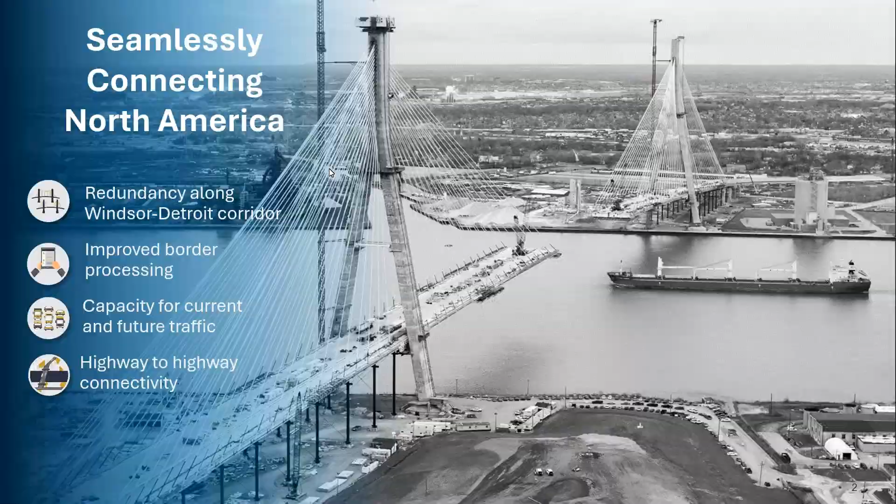In September 2018, WDBA selected Bridging North America as its private sector partner to design, build, operate, finance, and maintain the project. It's important to note that even though we have a private sector partner, WDBA continues to play a significant role in delivering the project alongside our partners at the Michigan Department of Transportation. Our private partner, Bridging North America, is comprised of companies such as Dragados, Fluor, and Aecon, with AECOM as the lead designer.

Before we begin, I'll do some quick context setting to familiarize you with the project and give you a lay of the land for when we're out on site. Valued at $6.4 billion, the project includes the delivery of 4 major components: the bridge, the Canadian and U.S. ports of entry, as well as the connection into the Michigan interstate system.

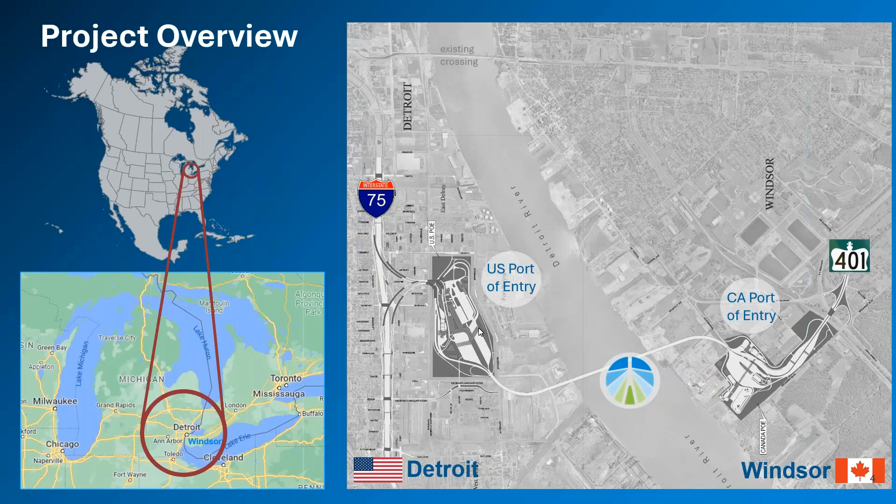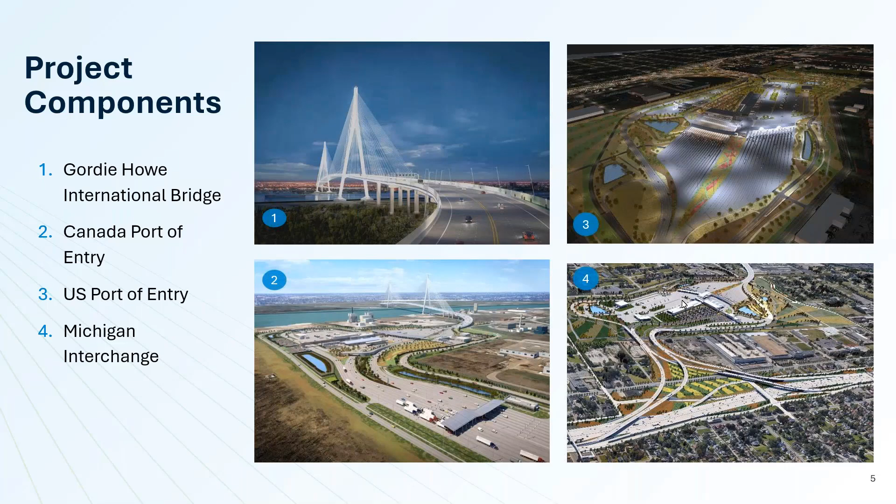These renderings show the 4 components of the project: the bridge, the 2 ports of entry, and the Michigan interstate. Each of these components is significant in its own scope and complexity. However, the focus of this presentation will be on the cable stay bridge.

An interesting aspect of the project is the environmental and sustainability considerations that have been incorporated. The Gordie Howe International Bridge project is an example of sustainable infrastructure that contributes to a clean environment, protects communities from impacts of climate change, and conserves resources for future generations.

Among numerous features, some key examples of sustainable design integrated into the project include LED lighting for exterior lighting and in port of entry buildings designed to take advantage of natural light, a water management system to reduce water demand, and integration of peregrine falcon boxes into the bridge design.

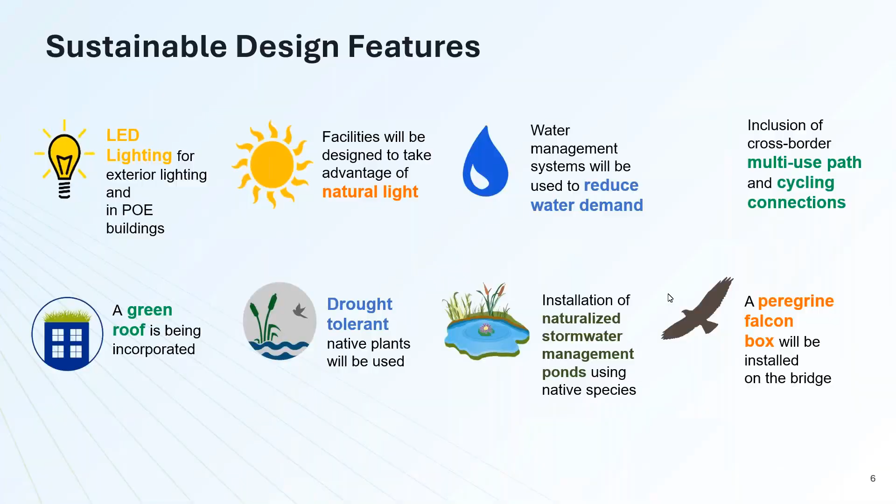The cable stay bridge will have 6 lanes, 3 Canadian bound and 3 US bound, with a clear span of half a mile and no pier in the water. The bridge is built for a 125-year service life.

The main tower is approximately 722 feet. The total length of the bridge from abutment to abutment, including both approaches on the US and Canada, is 1.5 miles. The main span is half a mile, roughly 2,800 feet, between the towers, making the bridge the longest cable stay span in North America and the 10th longest in the world.

This is also the world's longest composite deck cable stay bridge for this type of deck. The approach bridges consist of 9 spans on the Canadian side and 9 spans on the US side.

There will be more discussion in detail about the substructure, but briefly, the tower and pier are formed in reinforced concrete. The superstructure for the main bridge is a steel girder with a full depth precast concrete deck. The approach pier consists of steel curved girder with cast in place deck.

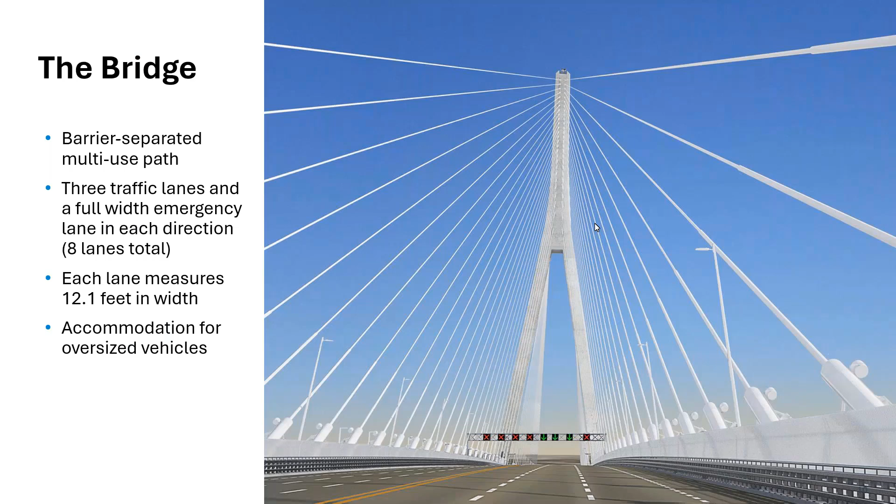A 125-year service life was demanded, and the bridge is built for that, for non-replaceable elements. We will discuss the foundation in more detail.

As construction is near completion, we are now in the process of final commissioning and testing.

In addition to being the longest cable stay bridge in North America and the 10th longest in the world, Gordie Howe International Bridge will include features specifically created for commercial traffic.

The bridge will include lanes that measure 12.1 feet wide with an extra wide lane to accommodate oversized vehicles. Additionally, the multi-use path for pedestrians and cyclists is separated from vehicular traffic with barriers, and that separation continues throughout the entire footprint. Now we'll go into greater detail about the design features of the Gordie Howe International Bridge.

This is the bridge superstructure elevation view, showing the navigation channel envelope for the Detroit River, which is roughly 2,500 feet by 137 feet. The maximum under bridge clearance we met is 152 feet in the center span.

The US side span is around 1,171 feet, and the Canadian side is around 1,155 feet. We have 2 side span piers, as you can see on both sides, and 1 anchor pier at the end of the back span of the cable stay bridge.

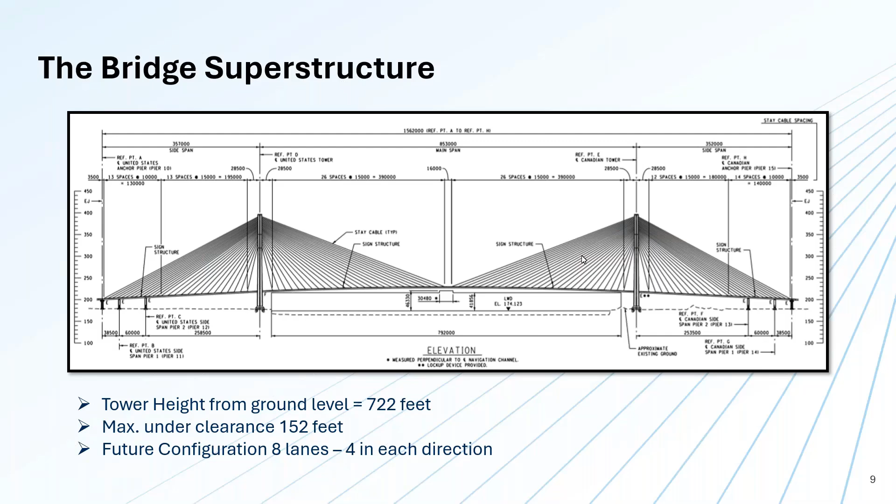The superstructure for the entire cable stay bridge is steel with post-tension precast. Steel used in the bridge was sourced from both Canada and the United States, under the Can-Am provisions of the project agreement. This is an image of the bridge superstructure deck.

The maximum superstructure depth is 10 feet. The superstructure is a closed box with a soffit panel at the bottom and concrete deck slab on top, comprised of two 8-feet edge girders on the sides, three internal longitudinal girders, and multiple floor beams at 6.4 feet spacing from anchor pier to anchor pier, connecting the two edge girders on the sides.

The deck thickness is 10 inches, including a 0.4-inch sacrificial top surface thickness. A 2-inch layer of latex modified concrete was used as a surface overlay. The precast deck panels are post-tensioned in both directions and use around 10,000 psi concrete. The deck is designed as a zero tension limit in the service limit state, which was required to improve durability and service life.

Also, in terms of the structural design feature, the main towers are in the inverted Y configuration with two planes of cable connecting to the exterior of the deck. As I mentioned, the tower and substructures are all built with reinforced concrete.

The towers were constructed on an area with limestone rock located roughly 100 feet below the existing ground. The foundation depth for each tower leg is roughly 25 feet with a regular shape, as you can see in the drawing. The foundation type used is a drilled shaft around 10 feet in diameter. There were 6 drilled shafts for each side of the leg for each tower, and those foundations were rock socketed approximately 20 feet.

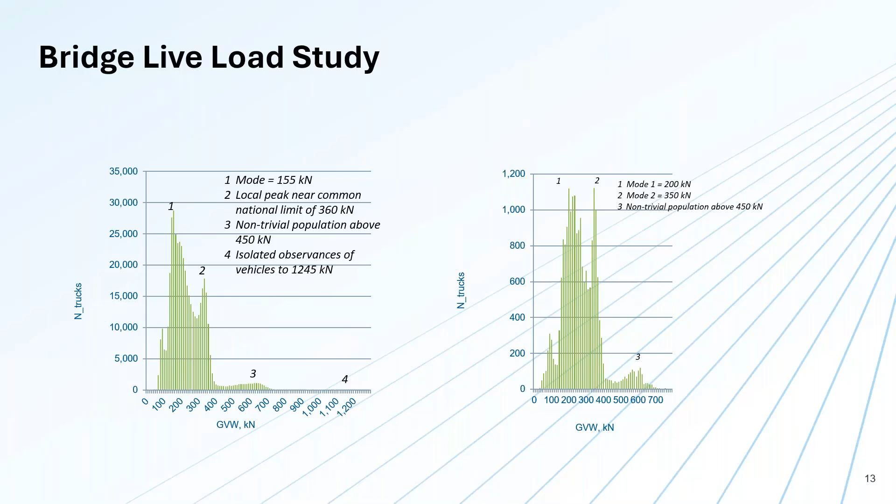The Canadian data on the right side is from the 2012 Ontario Commercial Vehicle Survey, and includes about 20,000 records from Southern Ontario. The maximum truck weight presented in the CVS data used in the load study was 180 kips. Two sets of normal traffic live load were used for the design based on the live load study for each design procedure, following the Canadian and US calculations.

The following sets of normal traffic live load are substituted for normal traffic live load in the Canadian and AASHTO codes. The intensity of the distributed live lane load was reviewed. The design truck is the same for both the commercial vehicle lane and mixed use lane.

For the Canadian design calculation, the modified loading will be considered. The truck used will be the CL625, which is the standard truck used by the Canadian Highway Bridge Design Code. The HL93 truck from AASHTO LRFD was modified to what we call a WDBA AASHTO truck, as shown on the right side, and was modified to become a 5-axle load.

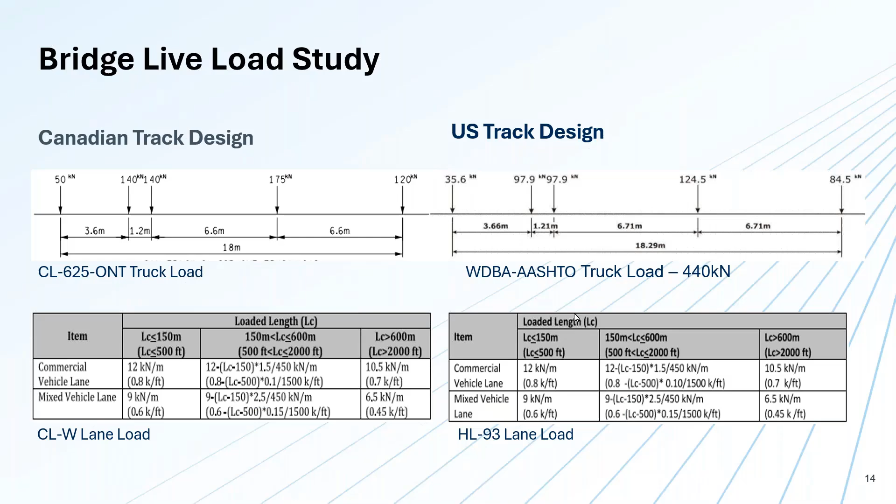In addition to the live load study, special loading design was considered for this crossing. The area goes through multiple parades and marathons, so we wanted the designer to consider that in the design.

Thermal gradient loading was also required, along with site-specific seismic design using lifeline, irregular critical structure criteria. These are terms used based on AASHTO and Canadian standards - they refer to the same thing but use different terminology.

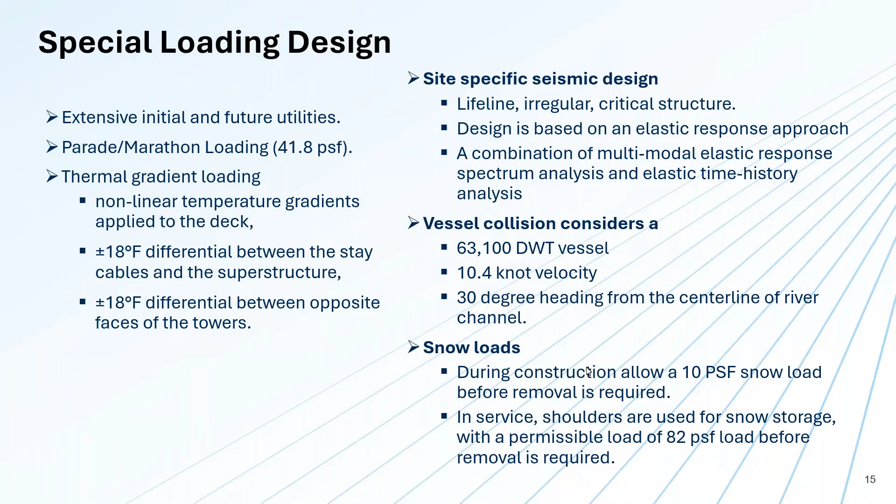Even though we didn't have any infrastructure in the river, the piers are located on land adjacent to the seawall or embankment on both sides. We wanted the designer to consider the vessel collision impact on the seawall, and any impact that could transfer through the soil into the foundation of the tower. Snow load was also considered due to the length of the bridge.

To meet the service life of 125 years, requirements were specified on certain criteria in addition to the durability analysis. Stainless steel reinforcement was used in the bridge deck and the precast. Structural steel options were allowed for the designer to choose from.

They ended up using the A709 structural steel. All structural steel, including weathering steel if used, shall be coated to meet the requirements for the service life.

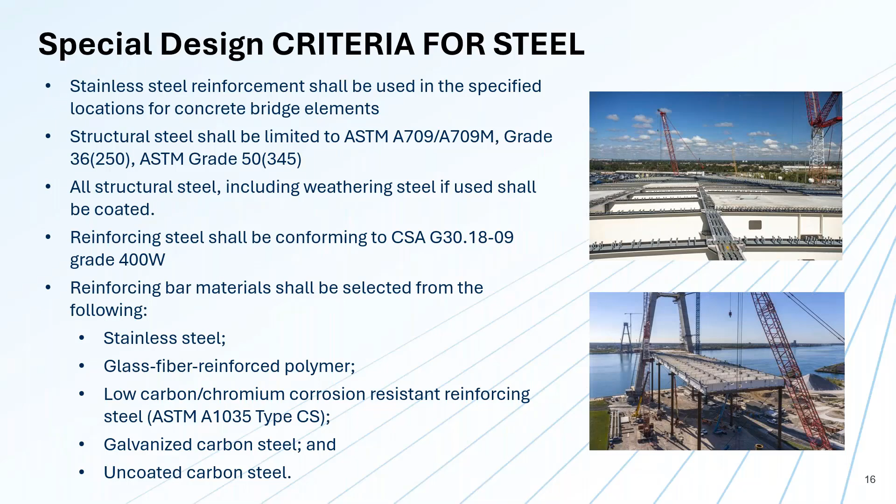The reinforced steel used in the bridge was grade 400W. The technical requirements also allow the designer to select different types of reinforcement, but stainless steel was mainly used when specifically required by the technical requirements or by the durability plan preparer and designer. They also used some typical low carbon steel.

The parallel strand system is composed of individually sheathed and filled 7-wire strands encased in outer extruded high density polyethylene, or HDPE, and are 0.6 inch in diameter with a cross-sectional area of 0.23 square inches. The approximate forces on the cable vary between 770 kips to 2,800 kips, depending on cable location and length. There were 216 parallel strand cables used on the bridge, with the number of strands varying from 38 to 122 depending on the cable.

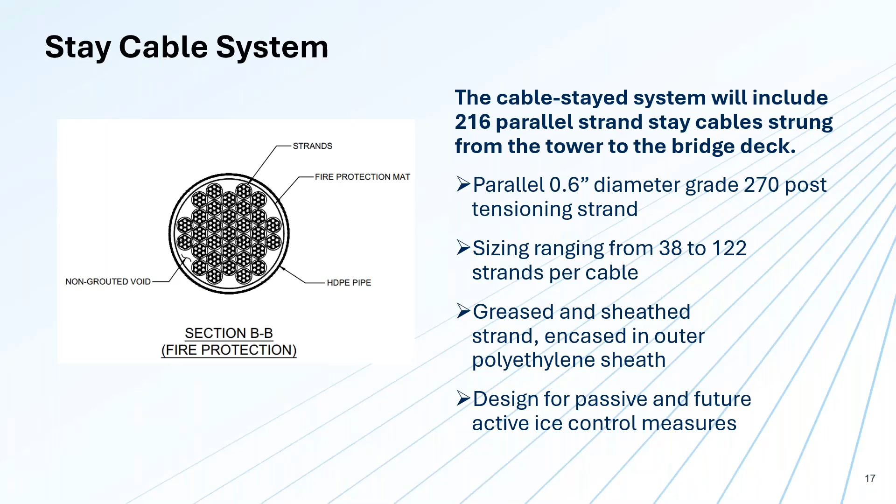I mentioned the service life and design life. These are the service life requirements considered for the project in 3 steps. During design, the concrete cover, concrete mix requirements, steel detailing and coating, and similar matters needed to be considered. During construction, we wanted the means and methods selected to consider the service life requirements, and very stringent QA/QC requirements were identified by the agreement for the contractor to follow. Also, because it's a P3 project, we wanted this considered during operation, as our private partner will be responsible for maintaining the bridge for a 30-year term.

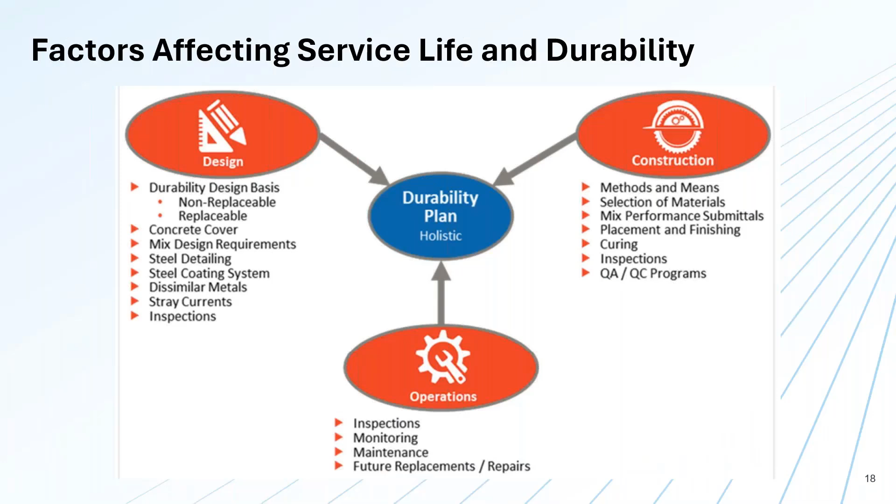As I mentioned earlier, the bridge is the longest in the world utilizing a composite steel superstructure with a concrete deck. This represents a step forward for the bridge, and therefore aerodynamic performance was a key consideration in the design. Wind tunnel tests for the complete structure and for the bridge under construction were conducted at RWDI facilities in Guelph, Ontario, one of the largest facilities in North America for this kind of signature and significant project.

Requirements for the test were: the bridge shall not exhibit aeroelastic instability during the construction phase for a wind velocity having a return period of 1,000 years. The bridge also shall not exhibit aeroelastic instability, flutter, or galloping in service for a wind velocity having a return period of 10,000 years, during the operation phase. The bridge is aerodynamically stable in wind beyond 1 in 10,000 years, assessed to be a wind speed of 108 miles per hour.

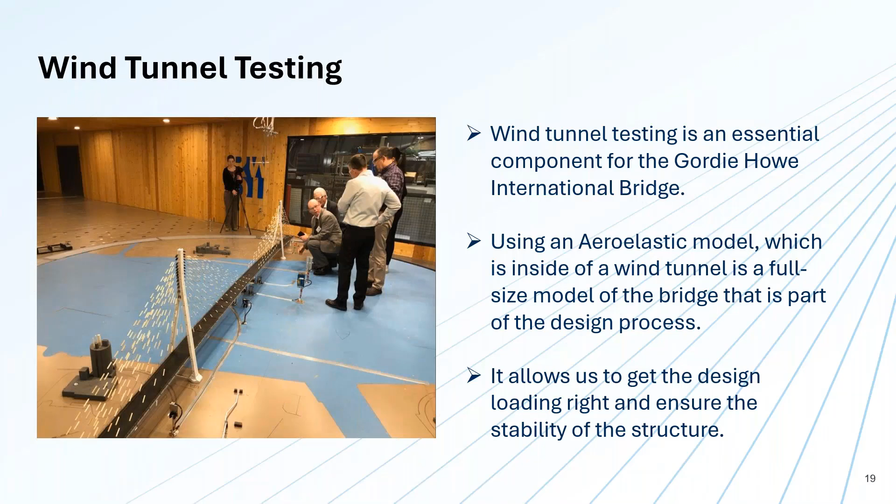That was the first model, the sectional model. This test investigates stability against flutter, vortex shedding, induced motion, and response to buffeting wind at different stages. The geometric scale of the model was 1 in 65. The test was carried out using a full-scale 10-minute mean wind speed range of at least 32.8 feet per second to 230 feet per second.

If you're familiar with meters per second, that's 10 meters per second to 70 meters per second, or in miles, 156 miles per hour. The test also was carried out with heavy high-sided vehicle traffic on the main bridge because it's very busy crossing, so sometimes there will be commercial vehicles packed from one end to the other end of the bridge. The wind model considered that.

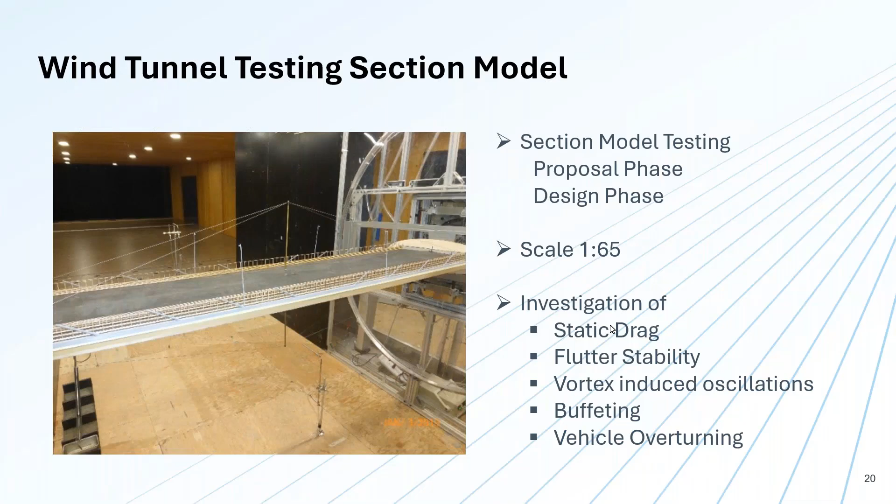The second model was testing the aeroelastic model for the bridge with a scale of 1 in 230. This model was tested at a stage of construction and also as the full bridge constructed and under operation.

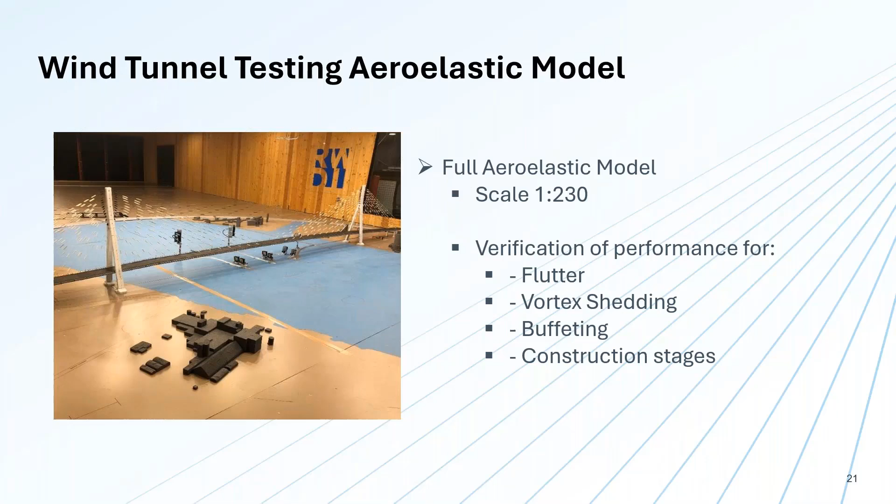The other model is the tower. The tower was tested as freestanding, because of the way these bridges are constructed, the tower will be built prior, at a certain length, before the cable is connected to the deck and to the tower. Therefore, we wanted the tower as well to be tested, including the tower crane as you can see in the model, tested as a freestanding structure.

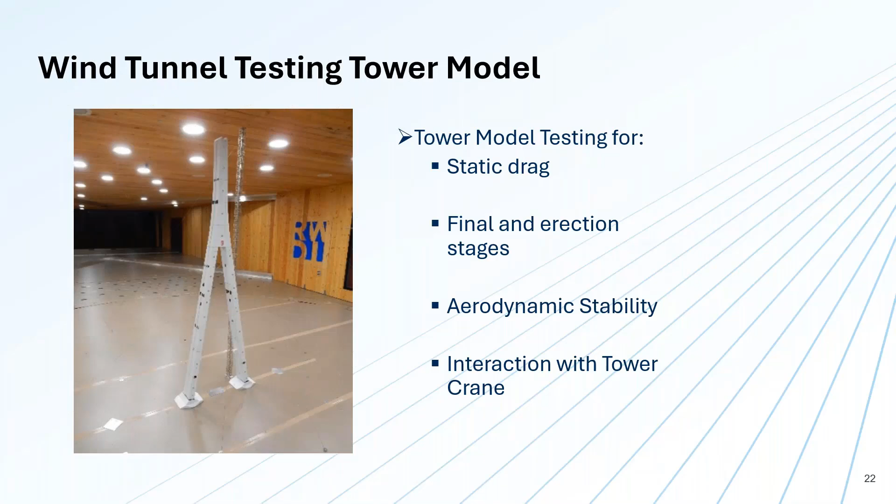For the surface overlay, the contractor used latex modified concrete, 2 inches thick, used for the travel lane and also for the multi-use path.

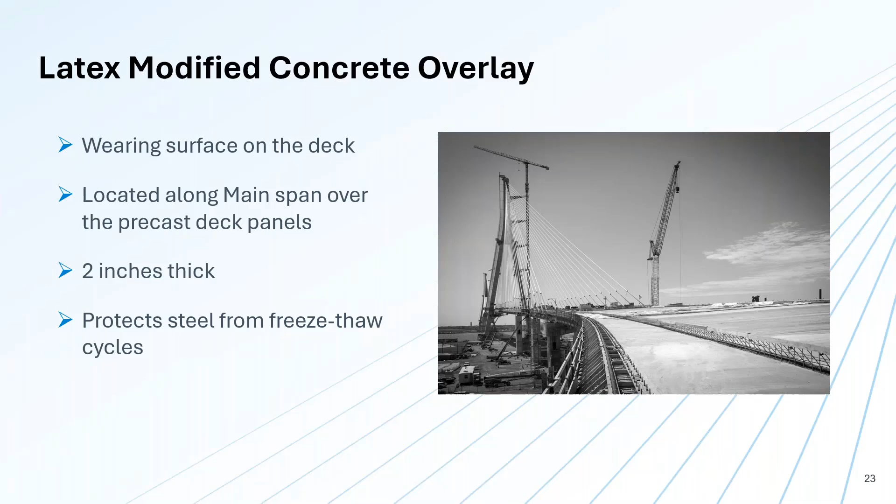Some of the challenges in the design and construction: designing a bridge between two nations means you need to meet the requirements of both nations, and sometimes there are different standards. Therefore, the requirement was to design for both standards, use the most stringent result from the analysis of the two standards, and use it in construction.

During construction, construction started in 2018, and as you know, we had the COVID pandemic.

Although we have some of the large elements of the project, because of the size of the elements, the contractor was able to mitigate some of the work because they can allow space between workers to do some work. But there was an impact from COVID.

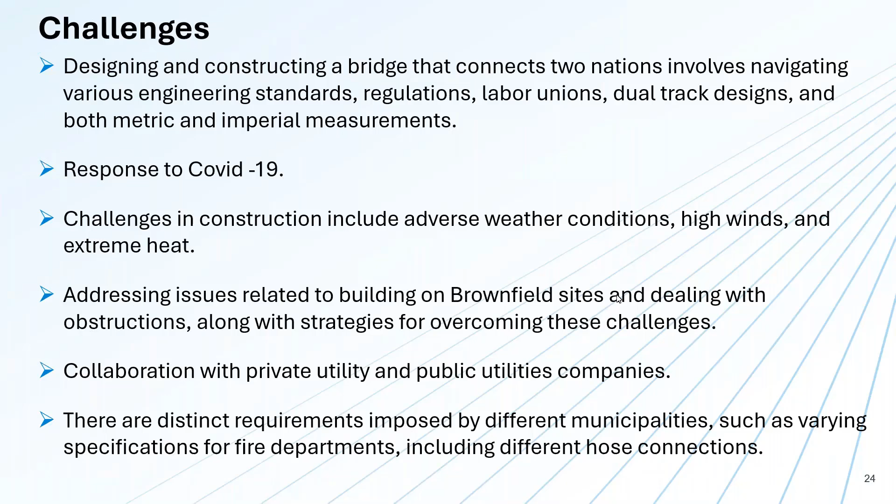There are some challenges in the area from the weather conditions, high wind, and also because we have the two sides of the bridge built on two cities, Windsor and Detroit. There were challenges dealing with private and public utilities. There was advanced work to relocate some of them, but some utilities still need to be relocated during construction. We also wanted to meet the requirements of the municipalities on both sides, which required a lot of coordination and discussion between the two city municipalities so that they would accept what we were building.

Some of the lessons learned from this project: for this kind of P3 project, establishing a communication protocol early in the project is very essential, and maintaining open communication at every phase of the project to address contractual issues and maintain cost and schedule.

As you saw from the slides, we have multiple stakeholders on both sides of the border, ensuring the necessary authority and contractual requirements are established for components that may be fully encompassed by the design, build, finance, operate, and maintain model. Documentation is very important - having complete documentation at the early stage of the project will help at the end stage when you try to close the project. And again, collaboration among the internal teams is something that needs to be focused on.

With that, I will turn it over to my colleague, Jonathan Keano, to continue the presentation.

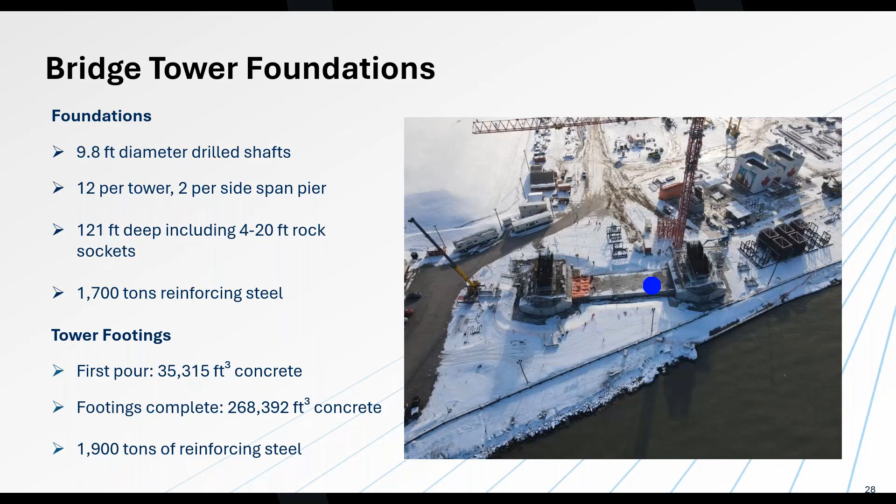The tie beam is essentially part of the footing of the foundations that connects the two footings. Its purpose is basically to resist lateral forces that will be transferred onto the footings. This tie beam is post-tensioned using 25 ducts, which house 31 strand tendons.

So following the construction of the footings, construction of the main tower legs started. As you can see from the pictures, there was some flexibility, or liberty to put it that way, for some design art on the US and the Canadian side.

So on the US side, you'll see they use the blue colored jump forms, and on the Canadian side, they had different art representing basically the Canadian culture.

So the tower construction is broken into three pieces: the tower legs, the upper cross beams, and the tower head. Each tower has a north and south leg that meet at the upper cross beam before joining the tower head above. Installation of the climbing formwork system used in the construction of the tower legs began in January 2021.

Each one of the 29 concrete lifts for each north and south leg tower contained approximately 3,500 to 9,500 cubic feet of concrete, totaling approximately 388,000 cubic feet. The density of the reinforcing steel in each tower lift was approximately 34 pounds per cubic foot. Most of the steel was pre-assembled in jigs on the ground and then lifted in place on the tower leg.

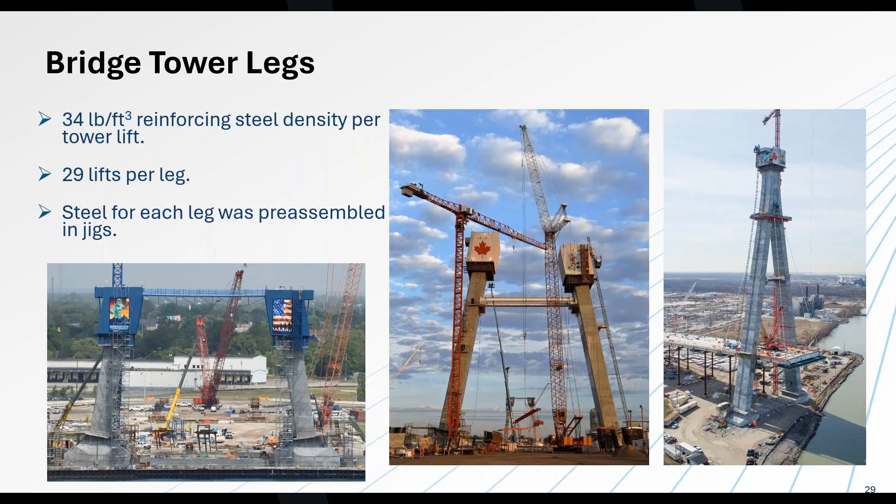Following the overall construction approach used on the main span of the bridge over the Detroit River, the technique used is called unbalanced cantilever or stick build. Starting from the main towers in Windsor and Detroit, construction of the bridge started outwards from the center.

The term cantilever in construction typically refers to a balanced approach with the same level of construction occurring on each side of the tower, but in the case of the Gordie Howe Bridge, it was constructed in an unbalanced fashion, with the backspan of the bridge road deck being constructed first and the temporary supports being removed once the stay cables were installed and construction of the main span began.

Construction materials and equipment were transported over the backspan to the construction zone once the main span construction started, and these activities were taken on the bridge deck, eliminating the need for equipment to operate from the water.

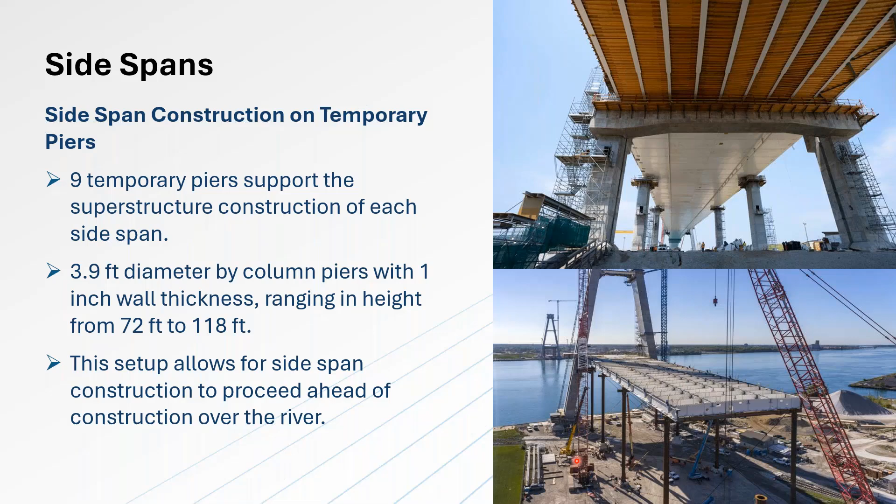The bridge approaches: the main bridge is connected to the ports of entry by a series of approach spans. There are 9 approach spans on each side of the main bridge, and in each of those 9 spans, there are 10 girder lines. All told, there's approximately 6,000 tons of structural steel required to construct the approach spans.

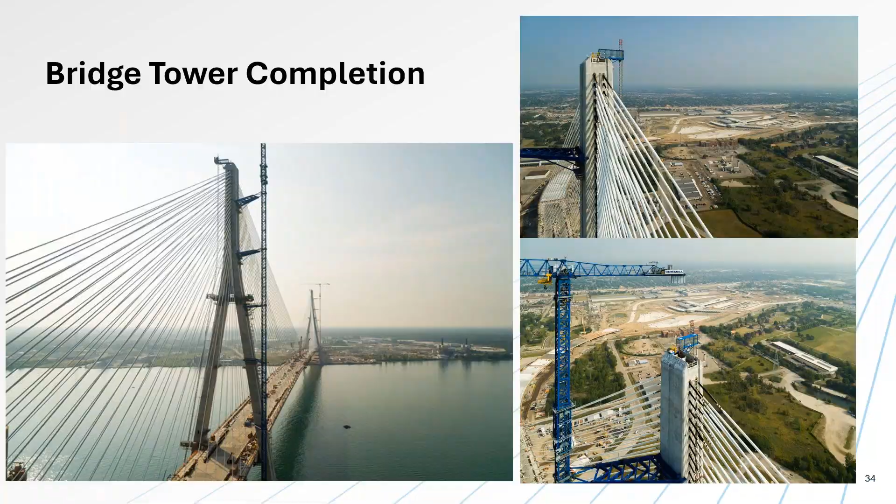So the US tower reached its final height of 722 feet in August of 2023. The Canadian tower was completed a little bit later, in December of the same year. Here's a few pictures showing the completed tower. The main span deck construction was a very complex operation, and a lot of planning went into it.

The two cantilevers stretched out from the towers almost a quarter mile and reached the mid-span segment in June of 2024. Before all the final pieces could be set in, there were a lot of temporary braces and jacks installed between the two leading edges of the cantilever to help the contractor control vertical alignment, horizontal alignment, racking, and things like that, to make sure they could get the final pieces set in place.

The operation to install the final pieces of the edge girder took place on June 14th of 2024. It started very early in the morning, which allowed the contractor more control and avoided being impacted by thermal forces from the steel heating up in the sunshine during the day. The operation went very smoothly, with the pieces coming within a couple inches of each other, requiring a little adjustment. It was a very successful operation, due in no small part to all the planning and preparation that the contractor and engineer did to get to that point.

Just real quick, a few more things about the stay cables. As mentioned earlier, there are 216 of them on the bridge, with anywhere from 38 to 122 strands in each. If you placed the unstressed strands end to end, there would be almost 3,000 miles of it used in the project. To give some perspective, if you set them end to end, that would take you from the Gordie Howe project location all the way to Anchorage, Alaska.

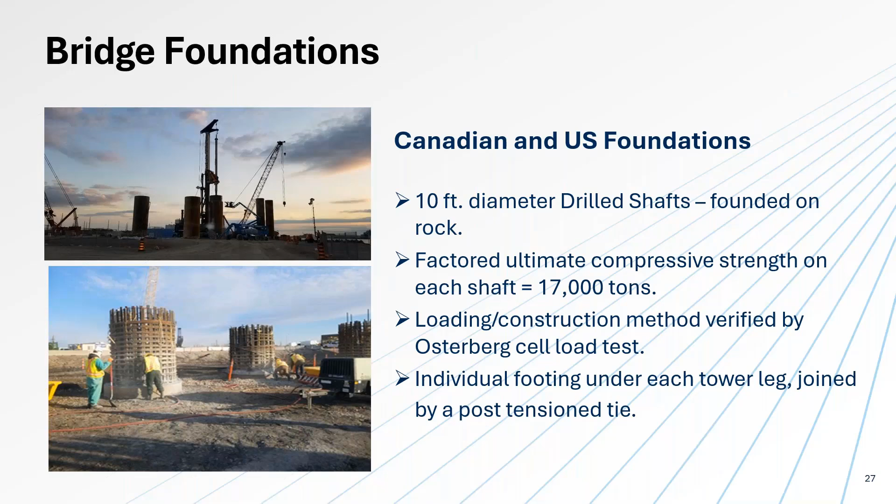Were there any challenges on the project associated with the accidental mixing of metric and imperial units? If you noticed from one of the slides, I mentioned the dual design. During development of the project agreements, because different parties used different metrics, we required two designs, one in each unit. The designer used stringent requirements from those designs but issued the final plan in a single unit - not both units - for construction. Design considered any issues as far as connection or survey issues.

What is the P3 public-private partnership agreement for future maintenance? Our private partner - that's why our contract is design, build, finance, operate, and maintain. We have a contract with them to design, build, finance, operate, and maintain for 30-year terms after substantial completion.

They are responsible for maintaining the assets, and then there are requirements for the handback of these assets after the term, which is 30 years.

Who does the load rating and bridge inspection for this bridge, and will the load rating be accomplished in metric or imperial units or both? The requirement is for the designer to provide load rating reports during the DB phase, design build phase. These reports will use the AASHTO standards for load rating. During operation, any oversized vehicle will be evaluated by our private partner based on that designer-provided load rating.

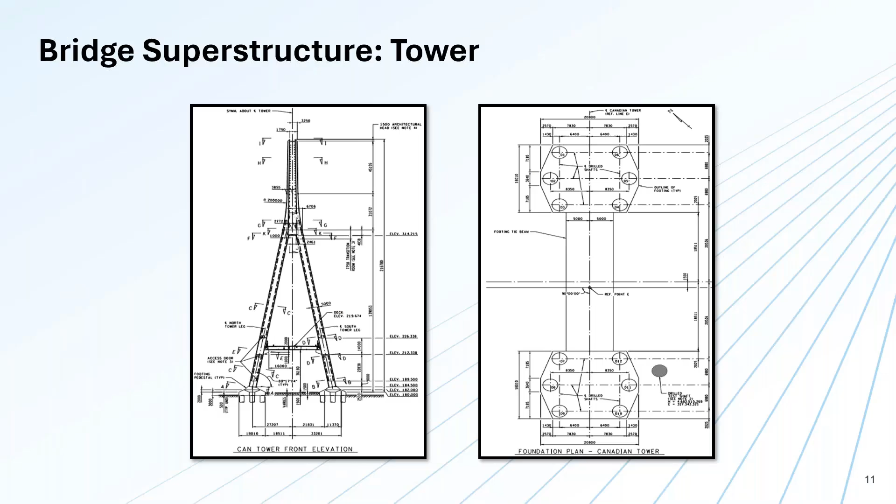So there are some sensors and corrosion resistance requirements installed, and also we have a requirement to inspect the cables. There's an option for robotic inspections, which, along the cable, inspects the HDPE pipe itself and the strand. There are some monitoring devices installed as well.

There was a question about the tensile stress limits for the deck—you mentioned zero. The requirement was because of durability and service life. Given how important this crossing is for trade, we don't want interruptions for deck replacement often. For the service life, the bridge deck is designed for zero tension under service limit states. Therefore, there are post-tensioning strands in both directions in some of the critical areas across the bridge.

Question: was the superstructure designed to meet AASHTO SRM and/or IRM, the AASHTO guide spec? SRM is system redundant members and IRM is internally redundant members. That came around 2018, that's a guide spec—did y'all use that? We follow the SRM. Therefore, the edge girder, the steel girder, is designated as SRM. The intention was to minimize hands-on inspections. If you designate the bridge that way, the steel girders were fabricated as fracture control under the stringent requirements of D1.5.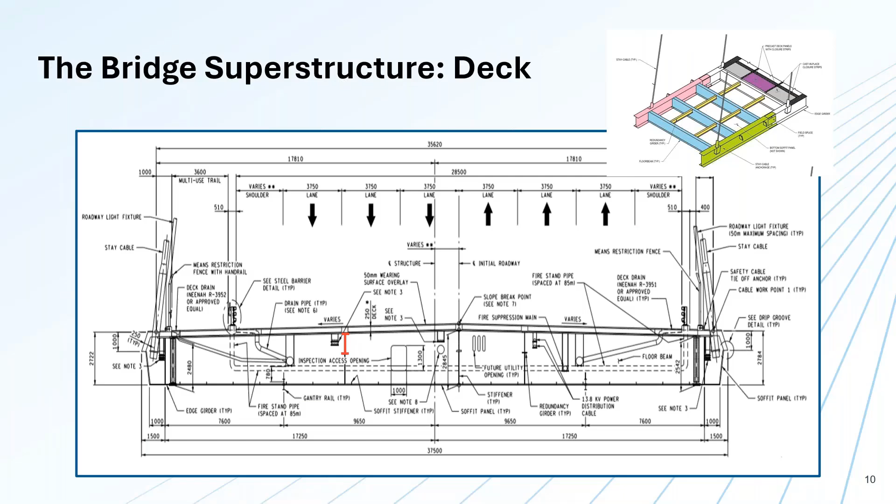Which codes were used for vessel collision analysis? Both codes, actually—we wanted them analyzed using both the AASHTO LRFD and the Canadian Highway Bridge Design Code, since both codes have sections for designing for vessel impact. What we did was specify the vessel loads to be considered and the degree of impact on the seawall embankments adjacent to the tower.

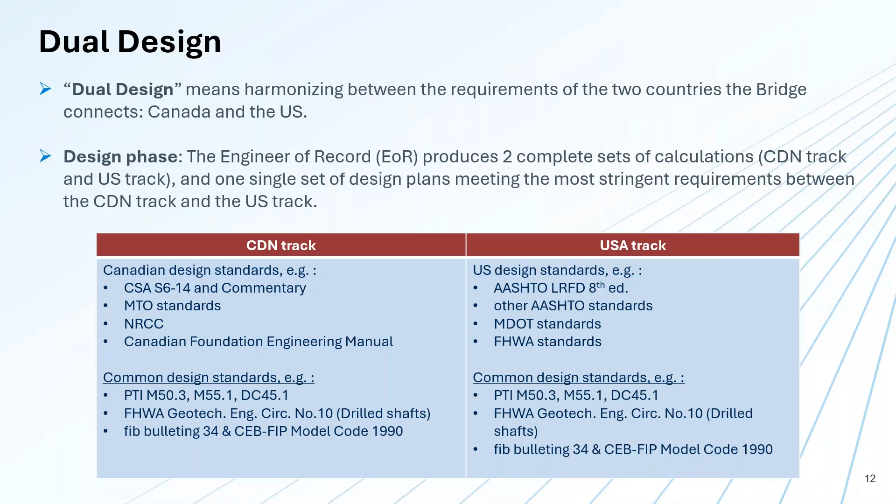Are the stays jacked from one end only? They are jacked from the deck level only. Do you have any idea of the average duration of erection per segment? Typically there was some learning curve in the beginning—it started with about 2 weeks, because as you notice from Jonathan's sketch, it was assembled by placing the edge girders, then connecting the floor beam, and then the three longitudinal girders for each segment. The cycle varied in the beginning, sometimes 2 to 3 weeks, and later they went very, very quick with less than that.

Who supplied the anchorage system, and did y'all do cyclic fatigue testing on the anchorage? DSI, DYWIDAG—I'm sure people are familiar with DYWIDAG, DSI. On the U.S. side, they supplied the cable system and the strands, and yes, they comply with all the fatigue and design requirements.

Okay, I'm going to ask Rick to come on and pick up, he'll get you some more questions. Rick. Yeah, thanks Paul, so yeah, there's a lot of questions here.

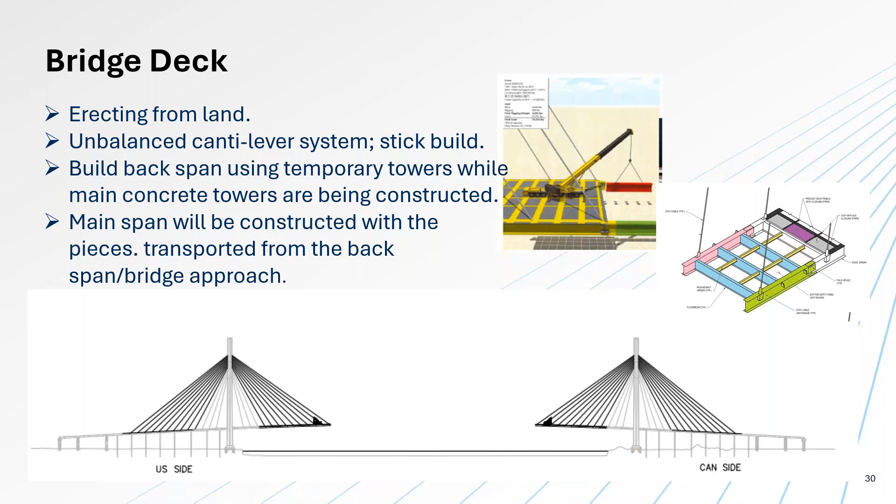One question that was interesting: in the deck, the cast-in-place deck used stainless steel. Was there a reason hot-dip galvanized epoxy or something similar wasn't used for that reinforcement? It's just the service life—we want to minimize closure of this crossing, given how important it is for trade. So we wanted to go to the extreme in minimizing maintenance, rehabilitation, and replacement. That was the reason.

During erection, there was obviously a lot going on, and there was a model beforehand. How did the model match up to what you actually experienced as far as deformation and getting everything to come together as the bridge progressed? When you say the model, are you referring to the wind load? Yeah, or the analytical model—I'm assuming we had an analytical model somewhere for it. Yes, there was a wind analysis report provided by RWDI to the designer, which was considered in the erection.

And with this kind of bridge, the cable stay with this span, there is always fine tuning during the construction or stressing of the cable. So there are some adjustments on the forces on the strands on the cables during the construction, as is typical for this kind of bridge.

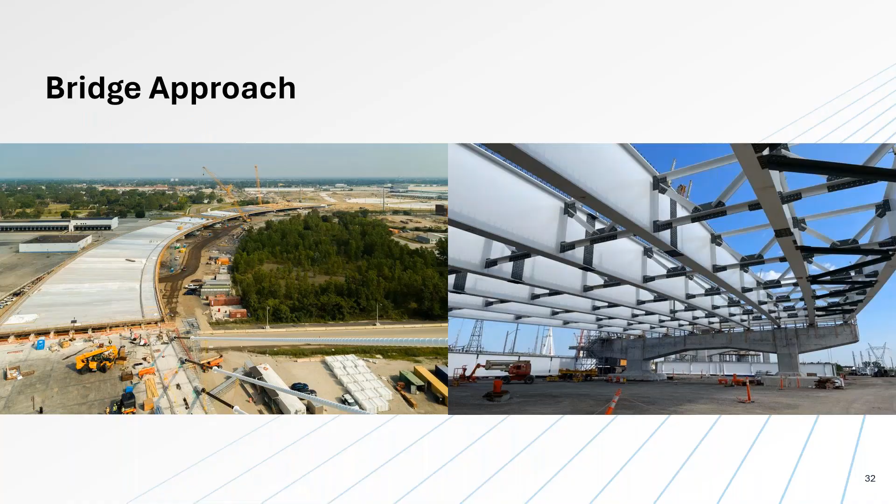I think one of the pictures Kyle had showed the final stage, the closure in the middle. Funny question here: who did the actual work on the final closure? Did the Canadian crew or the U.S. crew, or did they work together to do that final push there?

Actually, both the U.S. crew and Canadian crew worked on it. They started from the U.S. side and the Canadian side, and you can see the two tower cranes on the picture below. Then they met in the middle. We have a very nice picture of the iron workers from the U.S. with iron workers from Canada, at the time they connected, shaking hands between the two sides. Unfortunately, I didn't prepare that picture - it showed the flags from both sides and the iron workers standing on one side and the other, shaking hands.

Ice and snow on the cables, on the towers - what were the accommodations to make sure to prevent that stuff from falling into traffic during winter conditions?

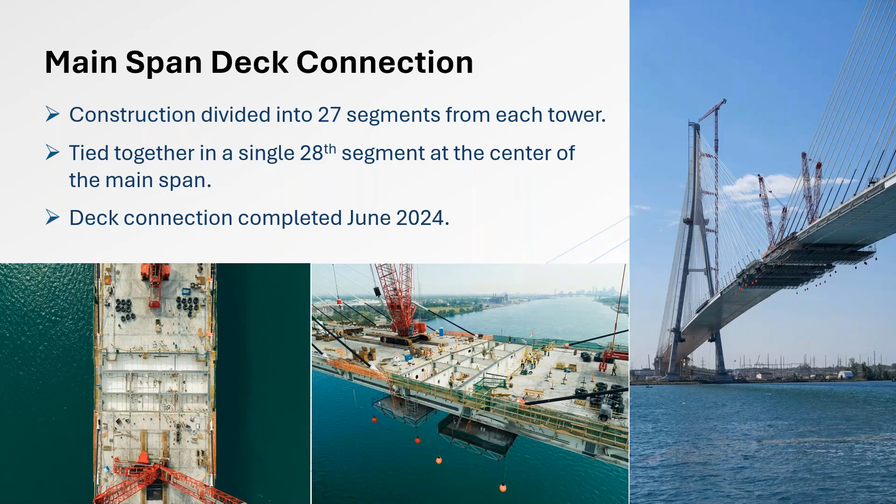As I mentioned, we did what we call a passive system. The passive system is normally based on the geometry you provide - the shape of the cable on top, the slope to prevent buildup of snow, and the shape of the tower itself. If you zoom in on the cable, you can see there are rings welded to the cable about every 1 foot of space, to minimize the buildup of snow. That's what we call the passive system for minimizing it.

And also there is the weathering system and alert monitoring, which is connected - we have 2 weather stations on top of the tower connected to our traffic management system.

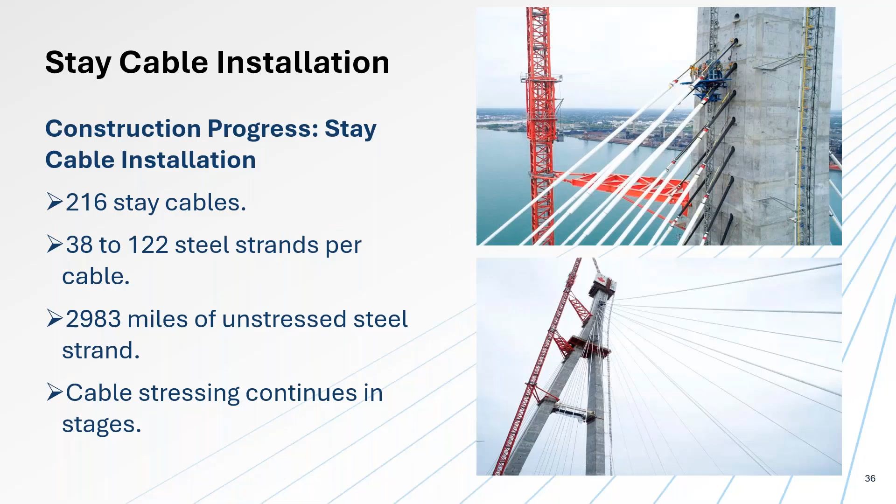For the towers, I think Kyle showed a picture of the embed in the tower itself, but I'm assuming someone was asking about the center - is it hollow where it can facilitate inspection? And that rolls into inspection of all the cables and everything - is there certain access established to get to doing all the inspection? I know in one of the cross sections of the superstructure you showed there's a manhole, or access where somebody can walk clear through, climbing through it. So I'm assuming consideration for inspection was part of it.

So yeah, the inside of the tower legs and the inside of the tower head are open. On the screen, the pea green color is open, and there's an elevator in the leg that gets you up to the point where the legs come together. Then there are ladders and platforms in the tower head at each of the levels where the stay cables come in. So everything inside is accessible for inspection and maintenance activities once the bridge goes into service. Good - obviously we've got to maintain it and watch everything that's going on.

So there's a variety of other little questions here, and a lot of them come back to things I think you addressed during your presentation. One of them was, what was the total cost? I think you mentioned that at the beginning - it's around 6.4 billion. Canadian or US dollars? Canadian. I think you guys can do the math, divided by 1.4 or 1.38, whatever.

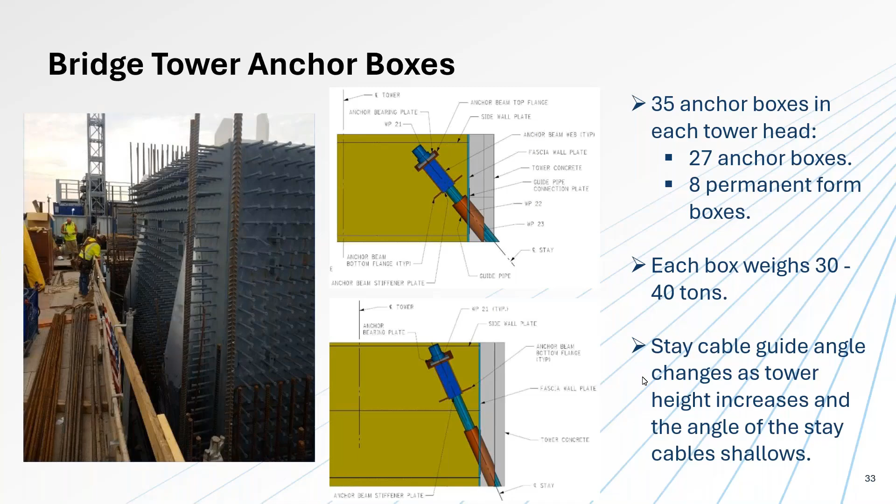Well, a great presentation, guys, and a great project. Like I said, really looking forward to driving it someday. So thanks, I'll turn it over to Adirad.